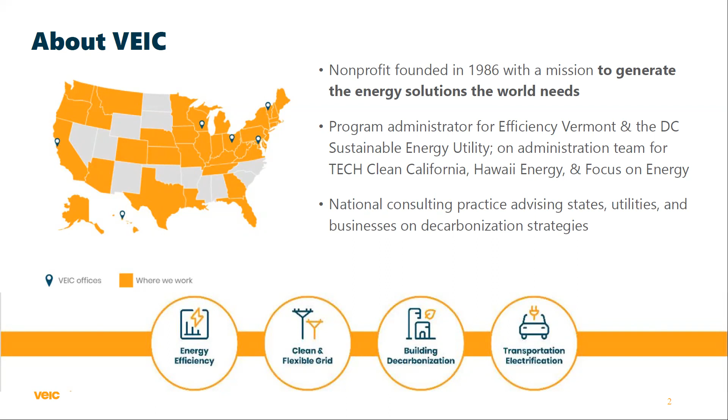So I'm based in Vermont, and our organization works all across the country. I have some data and some slides that I'll be showing from Vermont, not to hold Vermont up on a pedestal or anything. It was just really the availability of data and really trying to use what I show with some of these Vermont specifics as representative of what could be happening in other states.

So this provides a high-level visual of the road ahead and the daunting task of meeting our GHG emission targets by the year 2025, showing how those different categories stack up in historical performance from the 1990s to today. And really the daunting task of how we need to drive that down dramatically to meet our overall goals by 2050. So you can see that transportation is a big piece of that, the green at the bottom, and then building thermal energy is the next orange wedge there, and then smaller wedges on top of that.

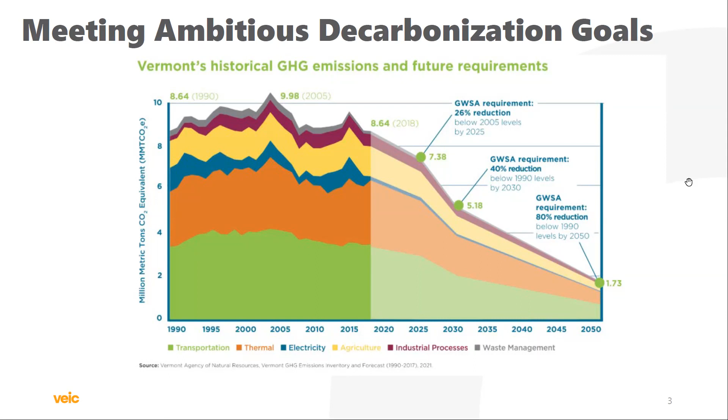So diving into some of the specifics behind that first graph, energy in Vermont, electrical energy is not a big overall piece of it, and our electric energy is mostly renewable already. We're 66% renewable in our electrical generation makeup.

Thermal energy accounts for almost half of the total energy, and only about 26% of the thermal energy is from renewables, and in Vermont that's mostly wood. And then our transportation sector, which is a big chunk of things, we are 94-95% non-renewable. So it's really the thermal and the transportation side that make up the very large components of our GHG emissions, as shown in the graph on the right-hand side.

Agriculture and industrial processes both emit more GHGs than the carbon footprint of our electric mix in Vermont.

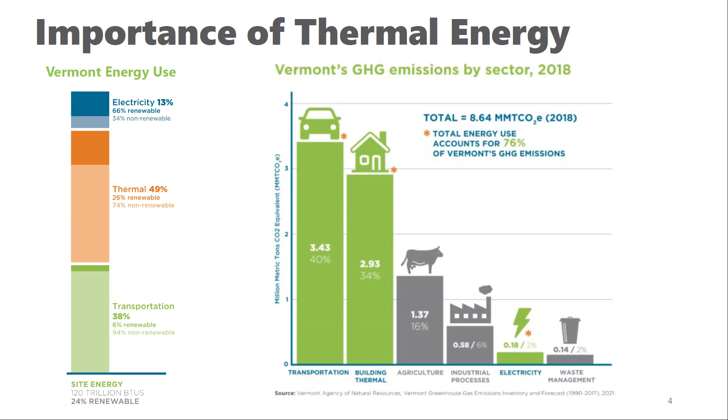So a big push to meeting those targets is going to be electrification and the deployment of air source heat pumps. Obviously everyone's familiar with them, and they come in various shapes and sizes. Ground source heat pumps are more efficient and can perform differently than air source heat pumps. But air source heat pumps will be a huge piece of the overall thermal energy electrification push.

And so we're seeing that in Vermont, in the Northeast, and all over the country. The fine print with air source heat pumps is that their performance is driven by the outdoor air temperatures. And as in the graph on the right, the blue line goes up, the demand for heat in a building increases as the outdoor temperature decreases. That's that blue line on the graph.

With air source heat pumps, as outdoor temperatures decrease, they can maintain temperature, but their efficiency drops and they work harder, requiring more electricity to keep up with the demand as outdoor temperatures decrease. So there is this balance point where in some cases there's a need for supplemental heating.

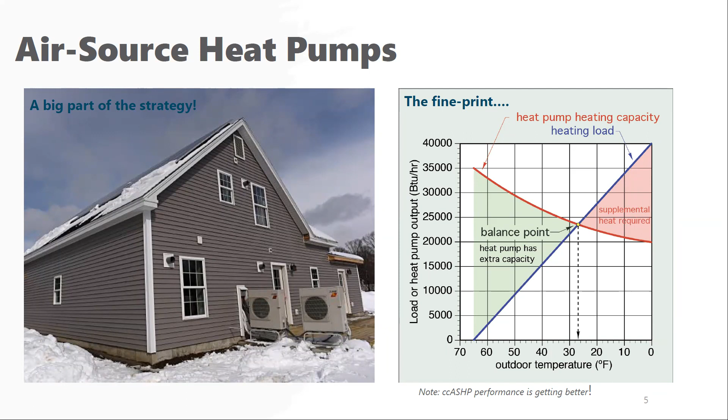So when we have the convergence of demand for the most amount of electrical energy from the grid coinciding with the coldest temperatures - this is data from 2021, the ISO New England grid mix for the entire year, filtered to times when outdoor temperature is below 70 - you can see a strong correlation that when we have the coldest temperatures, we're seeing the highest demand and the most time intervals when there is coal and oil in the mix. That's not exclusively coal and oil, but at these times, the ISO New England grid, which is by and large very clean, needs to deploy coal and oil to meet these high demands.

And with electrification - this is data from 2021 - with massive build out of this market to electrify, that pattern will only be magnified with the deployment of air source heat pumps.

So you can see the strong correlation. Obviously, to the right-hand side, there would be an upswing for summer peaking to meet cooling loads in the summer, but we filtered this graph to just the temperatures below 70 degrees.

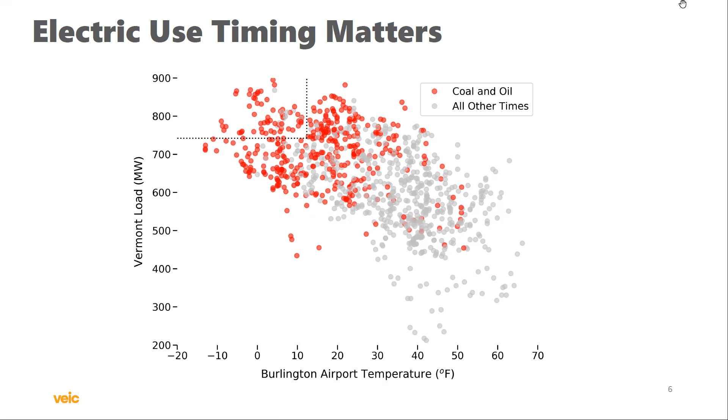One of the many ways in which we can create a hedge against this risk and minimize the impacts is the synergy and complementary deployment of wood heating and air source heat pumps.

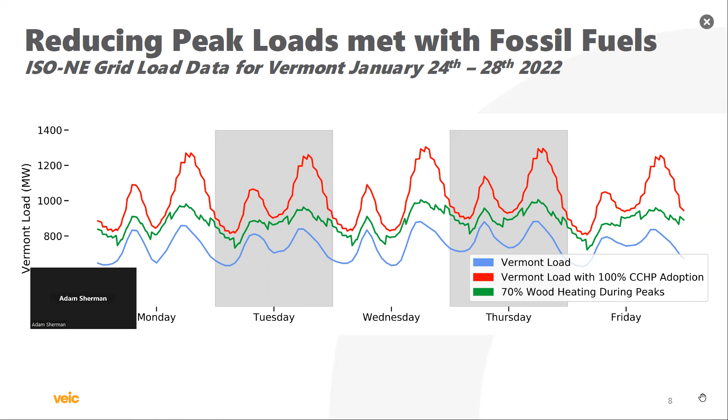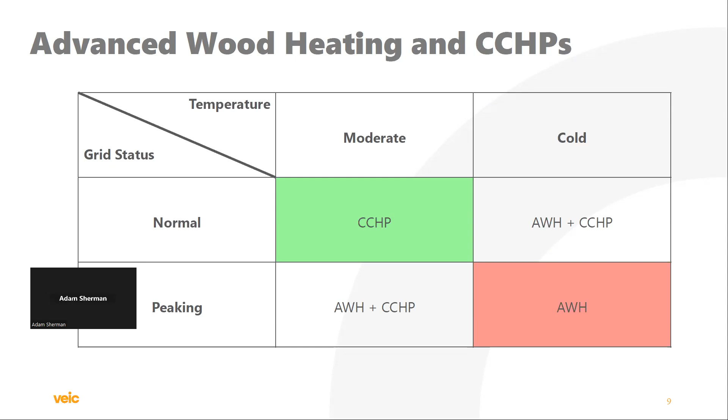One passing thought is, thinking about grid reliability and shaving peaks and filling valleys, storage is a big piece of that. One interesting piece I want to share with this audience is that a former colleague of mine pointed out the amount of potential energy in wood fuel and how that can function as energy storage. Running some fun back-of-the-envelope calculations, cordwood, when you look at the energy value...

...is the equivalent of 345 Tesla Gen 2 Powerwalls. So in terms of reliability and storage, I think it's an interesting way to look at energy storage and how wood can play that role.

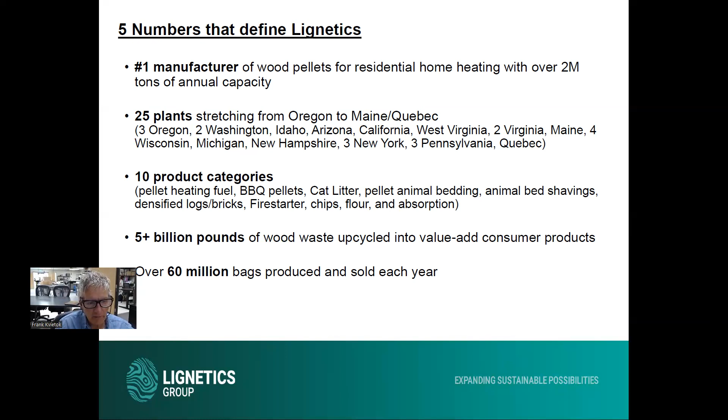So just a couple of numbers—25 plants. We've got a map on one of the subsequent slides that'll show you that, and the different product categories that we're in. We take care of a boatload of wood residuals, and I'll emphasize now and later as well, 100% of our feedstock is wood residuals. There are no trees being cut down for the purpose of making wood pellets, and that's certainly an important component of the overall life cycle assessment as you consider wood heat. Next slide.

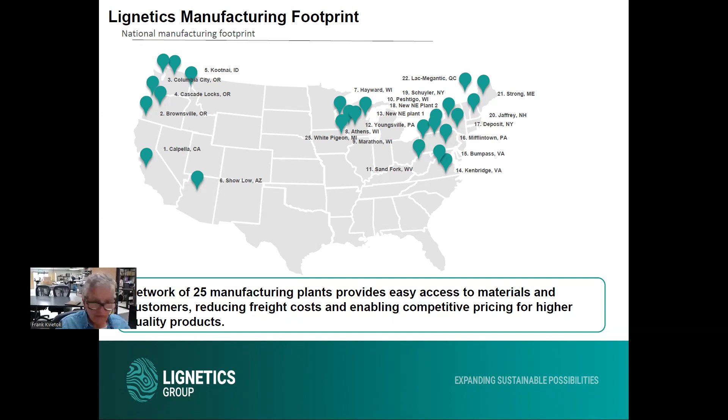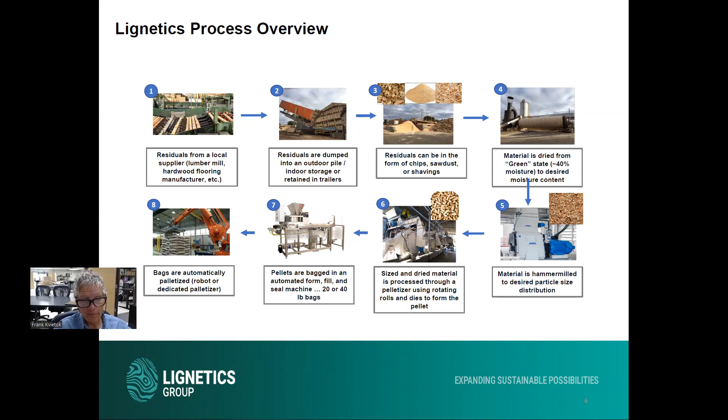Just a real high-level overview of how pellets happen. Maybe the bottom line is that it's not a super simple process. On one level, yeah, you're pressing sawdust into pellets and those are burned, but it is a real manufacturing process. The challenges related to it really have everything to do with the variability of the wood coming in, something many of you, I'm sure, very well appreciate. But drying the residual, sizing the residual, and then pelletizing the residual—all three of those technical steps are things we're actively involved in improving, to make them more efficient or to make the end product better performing. Move on to the next slide, please.

Again, 100% of our material is residual material, and we're in the process of getting 100% of that material SFI certified. As many folks know, there are a number of different certification programs you can participate in. We've so far elected to go with SFI and hope to have that completed by the end of next calendar year.

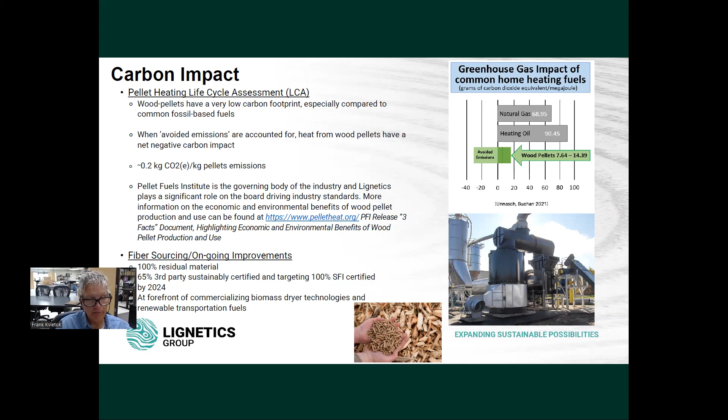Next slide. So when it comes to heat pumps, how do we think about them? Well, really, it's another arrow in the quiver. I don't think anybody should view it as the solution. It has, as with any technology, its pluses and its minuses.

From a consumer standpoint, one thing we well appreciate is that consumers really choose heating with pellets for economic reasons. In many areas, it's by far the lowest cost choice for them to heat their homes. And the pricing is also stable.

Stable means stable pricing, but stable availability as well. There is something reassuring that we've heard from many consumers: that they can load up their garage, basement, or shed with a couple tons of material at the beginning of the winter and know that they will have heat that winter. That's very satisfying, and they don't have to guess or wonder what the cost of the fuel is going to be next month.

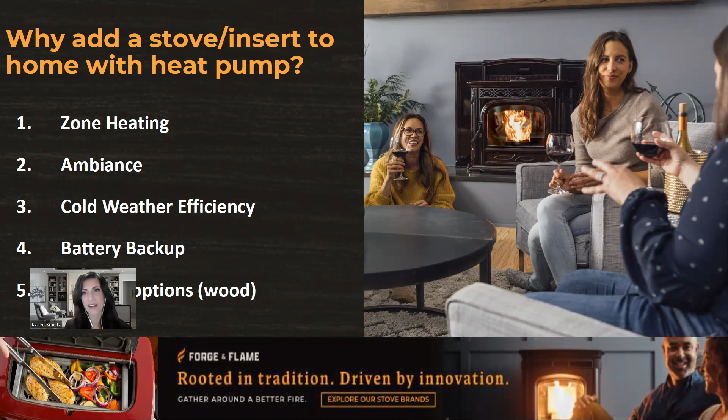Then moving on to the next slide, I wanted to talk a little bit about sustainability and what that means for us at Forge and Flame. We are very fortunate that our manufacturing process is very committed to sustainable practices, that we are manufacturing in a facility that is zero waste to landfill, among other things. And it's really neat that not only do we have a story about how we manufacture our product, but that it continues the sustainability journey into the home of the consumer.

And we know they're growing in awareness of this. We know that consumers are more likely to buy from a company that has a sustainability message. So here are some highlights from our Halifax plant and from Forge and Flame. We use 100% renewable energy in all of our operations across our whole corporation. All of our cast iron is 100% recycled, typically from old brake drums. So that means every piece of cast iron, every Harman, every Vermont Castings, and every Quadra-Fire cast iron is 100% recycled cast iron. And we recycle 100% of our scrap steel.

Then for the products that we are making with steel at this point, 60% of the steel products that we make are made with recycled steel, and we continue to have a goal to grow that number. We talked about the tax credit. We have 19 products that qualify for that. And we have a zero waste to landfill manufacturing plant in our Halifax, Pennsylvania facility.

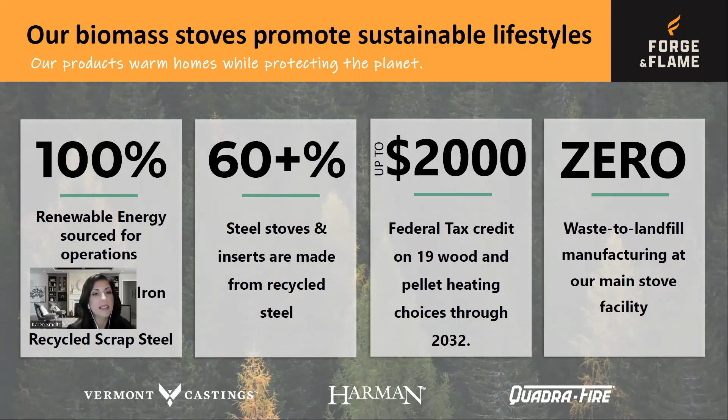All right, moving on, we can talk a little bit more about what we're doing for consumers and our trade partners. So it's important for us to talk about that tax credit, to make sure that when cost is a factor, consumers know they can get up to $2,000 back. And so we do have a tax credit social media kit that we provide for our trade partners, and we provide instructions and explain to them how they can get the message out there on their social media as well as print. We have showroom point of sale, and we also have a website dedicated just to tax credit and what that means and how a consumer can save.

So moving on to the next slide, this topic did provoke some action on our part, John. We've always focused on zone heating. Again, it's innate to us. It's part of what our business is. But we realized we were missing some educational content on how heat pumps can be complemented with stoves. So we are working on a blog as we speak that will help push that content out there.

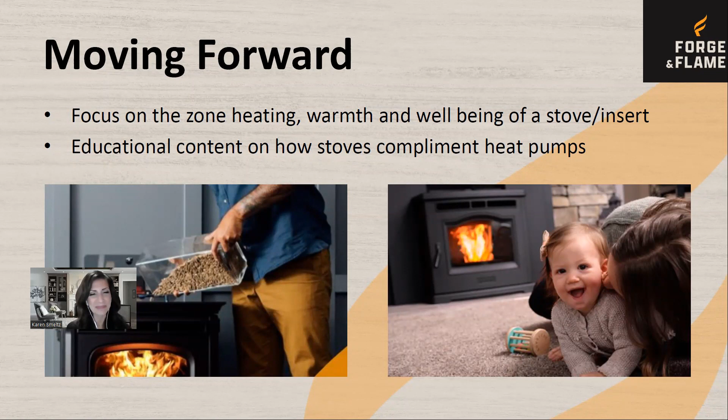So that is all I have for you today. I'm happy to field any other questions or conversations offline. Okay, thank you.

Thank you, Karen. That was a great presentation. And I'm glad you're working on a blog on heat pumps. I think a lot of stove companies will. On a personal level, I just put in some heat pumps. I'm looking forward to seeing how they work with my pellet stove this winter. Yeah, we want to hear that too.

All right, so we're going to launch our first poll and get some of your perspectives about what's going to happen with pellet heating, and whether everyone on this webinar today thinks that it will go up, or down, or stay the same.

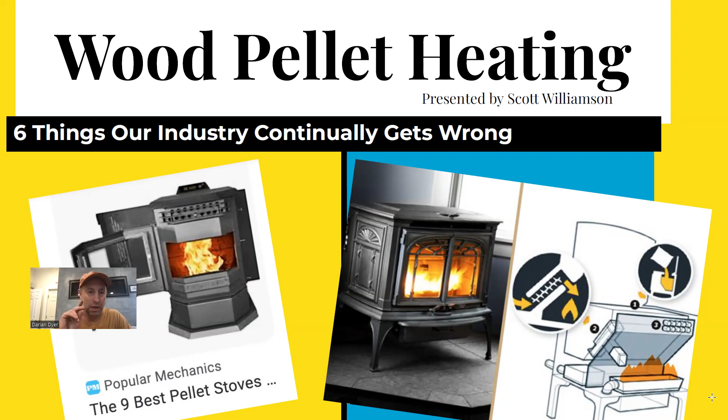You can move to the next slide. There we go - 6 things we should all understand about pellet stoves. This is kind of an overview of what I was thinking. And that...

There was always a rivalry between wood stoves and pellet stoves, and folks should understand that a pellet stove is a wood stove - it's an automated wood stove, and it has its place. It's never going to really replace the traditional rural wood stove that uses just stick wood, but it doesn't need to. It allowed the wood stove to get closer to the city, into suburban areas now, in single family homes, which wood stoves were disappearing from. So it fills a void.

Coincidentally, those single family homes closer to urban areas have other types of heating systems. So you're looking at a partnership of heat in a home, as opposed to one system doing everything - which is really what a pellet stove is. It's a supplemental heat source, and working with a heat pump, it's not a this-or-that - it's the 2 things working together.

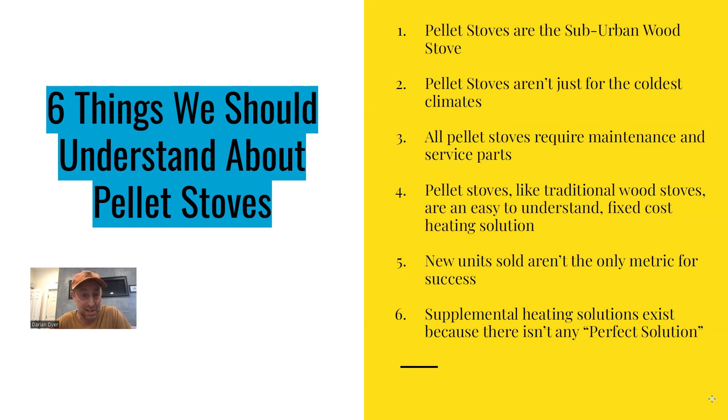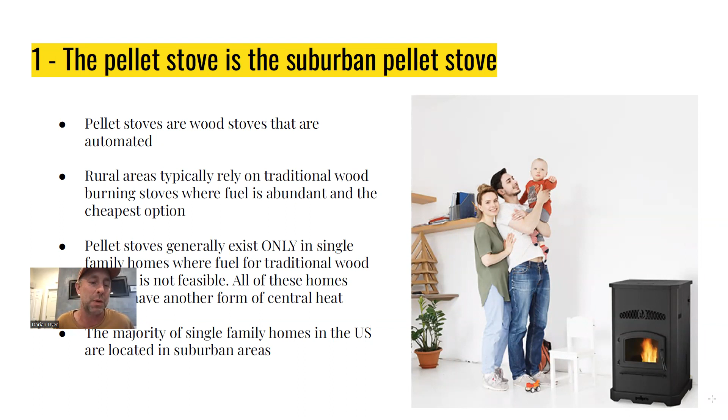Let's move to the next slide. The pellet stove is that suburban wood stove - automated, won't go to rural areas, but won't go to urban areas either. It fits that niche in the middle. Pellet stoves generally only exist in a single family home, where you're probably going to have a heat pump, and there are lots of folks - including you, John, since I think you just installed some heat pumps. The majority of single family homes in the US are located in suburban areas. Next slide.

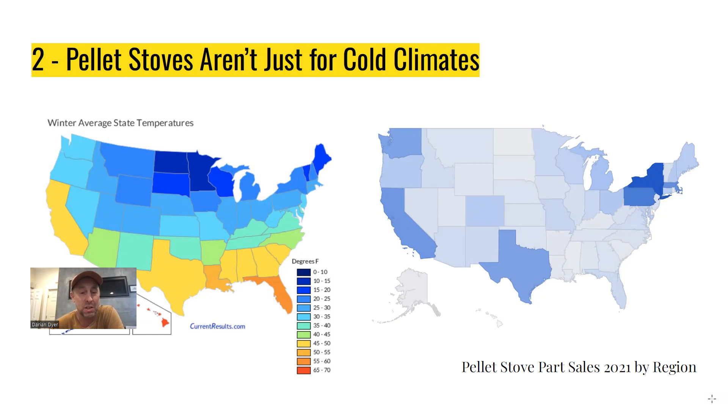Next slide. All right, so here's where you get a little bit of the numbers - 2021 orders by state.

The most amount of parts that we sent to any single state was New York, just under 6,000 for the year. This one actually includes some places in Canada. You can see there are many states here, like Arizona, where we're sending more pellet stove parts than to places you'd think would get them, like Nebraska.

Some of this has to do with shipping costs. We're on the East Coast, people are on the West Coast. I tried to do a weighted average to figure that out, and I couldn't get it done in time. That's what was holding me up with the slides. But as you can see, there are many places in here, like Texas, for example.

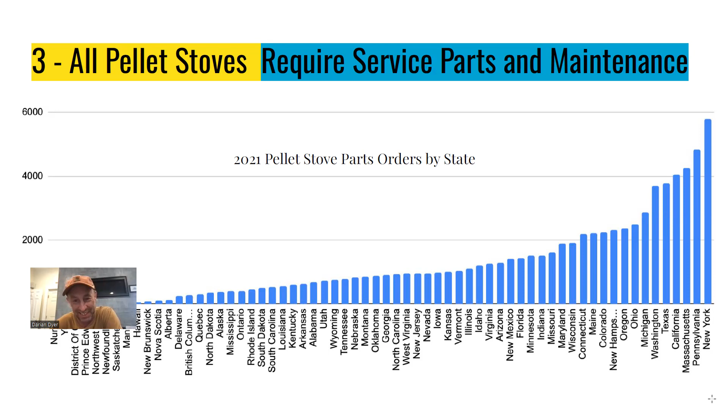Texas is a big one. Who would have thought? Before I saw all this stuff, I wouldn't have known. But they all require parts, and they all require maintenance. As you can see, it's not just in the coldest areas, it's everywhere. I challenge anybody to find an independent service technician for a pellet stove in Texas. It's probably not going to happen, but we got a lot of parts going there. Next slide.

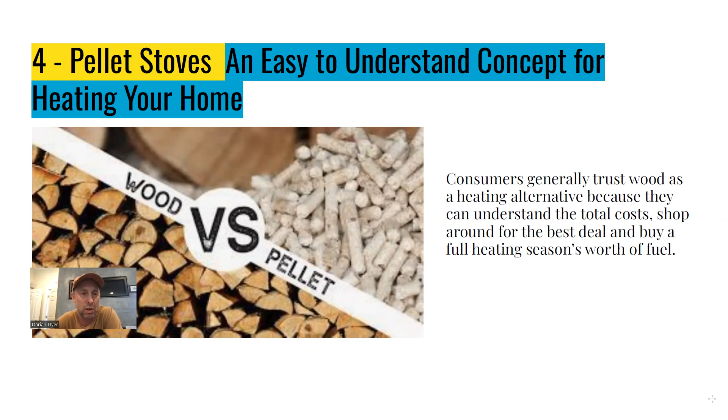They're an easy to understand concept for heating your home. What I've always loved about pellet stoves and wood stoves is that I can buy all of the fuel I need for an entire winter, and physically have it. I know where it is, I know how much I paid for it. I can shop around, I can have fuel left over from the previous year that I carry over. There's no flexibility for heating your home like that besides heating with wood, or if you have to buy something, it's nice to be able to have it and store it in your home. Number 5, next slide.

Stove sales alone aren't the only metric for figuring out how our industry is doing. We'll go back to this graph again. I think the speaker before me was highlighting the reasons, the barriers of people getting into the market. And when more people aren't entering the market, you got to figure out how to sustain your business when times are tougher. So you got to reach back out to the same people, and selling parts to them is or should be a huge part of any company's bottom line, because it was my entire bottom line. I work for a company, and it's still the same kind of thing, I just don't have to drive and get behind the stove in a corner of a house anymore.

Number 6, let's go to the next one. Supplemental heating solutions exist because there is no perfect other solution. Heat pumps are fantastic, 500% efficiency if you do it right, but as it gets colder, it becomes less and less efficient, so you need something else. A wood stove can't heat a whole entire house, so you have larger systems that are centralized. It's important to understand that the pellet stove is a supplemental heating device. If you have a small house centrally located, it could be everything until it's not. But that's really all that I got.

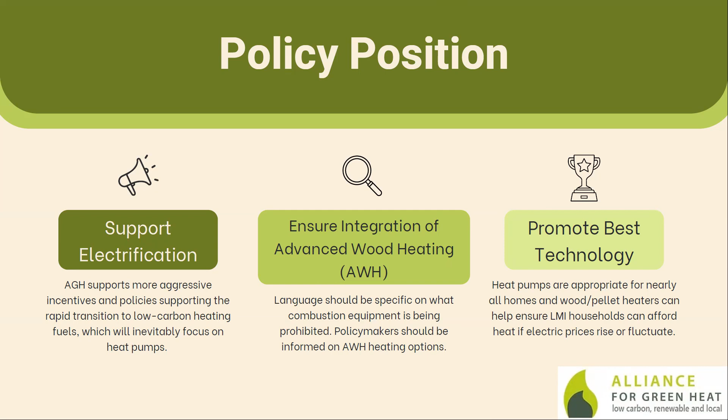On the first point, supporting electrification, we know it's evident that we have to begin transitioning away from fossil fuels. We're always thinking about the footprint of our buildings in the US - it's pretty high, about 30%. Buildings are generating, and about 38% of that's coming from heating and cooling, so this is kind of low-hanging fruit in some ways to decarbonize.

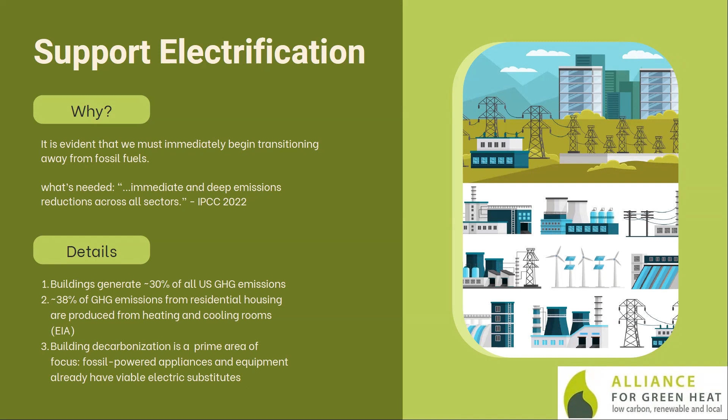We know that there are already substitutes ready to be implemented, so that's why ensuring integration matters - there is some policy language sometimes that would ban all combustion or all unregulated fuels, not fans, and we try to combat that. Pellet heating is safe and low carbon combustion.

I think all of our panelists have hit on this topic. Huge is that cordwood heating is essential for rural households. We know that they're out of electricity more often, we know that connections to the electric grid can be sketchy, so we really need an option for them.

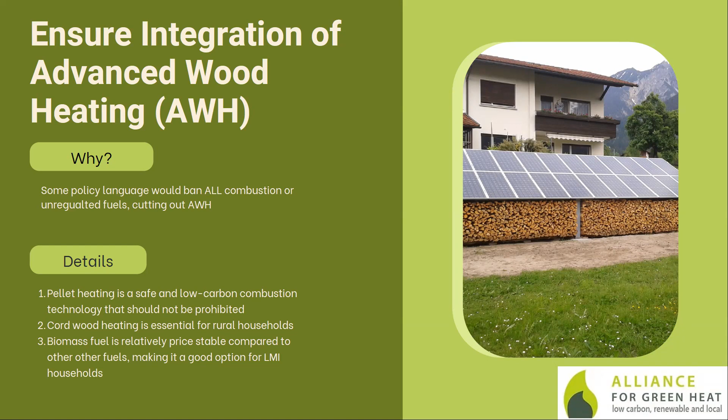And we know it's quite price stable. Biomass, wood pellet - instead of having the volatile jumps in pricing that natural gas often has, electric can have, biomass is really keeping super stable. So it's good for budgeting, good for low income, or really any household sticking to a budget who wants to know what's coming up instead of being surprised by a big bill.

And in promoting best technology, like I said, heat pumps are big. We really don't want policy language that could accidentally promote electrical resistance heating or baseboard heating - this would increase energy cost burdens on low to moderate income households, especially renters and affordable housing. So we want actual language saying when we're promoting electrification, we want pellet stoves in the right places, wood stoves in the right places, but we also don't want the bad electric appliances in those places.

A lot of that comes from the idea that energy bill savings are apparent. The DOE has estimates between 400 to 1,000 a year from fuel switching, which can depend on housing size and existing fuel prices. But even on a fossil fuel dependent electric grid, we know there's still savings on emissions when you switch from a gas furnace. We think that's important because it's often a talking point for the fossil fuel industry to prevent switching to heat pumps.

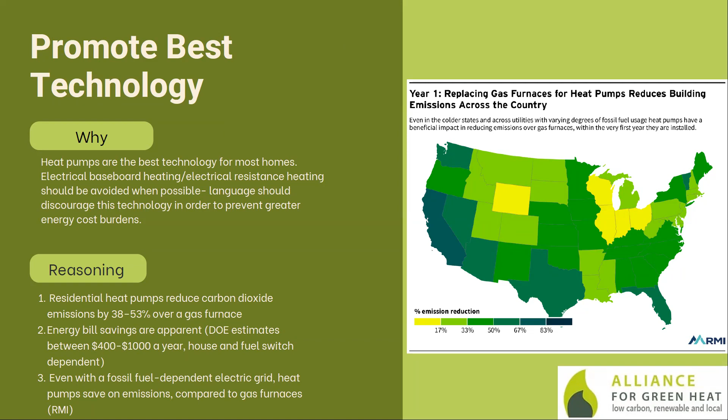We previously advocated on the Massachusetts electrification bill. We've advocated for stronger language dissuading electrical resistance in Maryland—that was one where they used the strongest considerations to keep out electric baseboard heating, but we wanted something a little more specific. We've also advocated for taking out language that banned unregulated fuels in New Jersey, which is one of the only states that doesn't really have a technical, political definition of rural. But pellets can also be great for suburban areas.